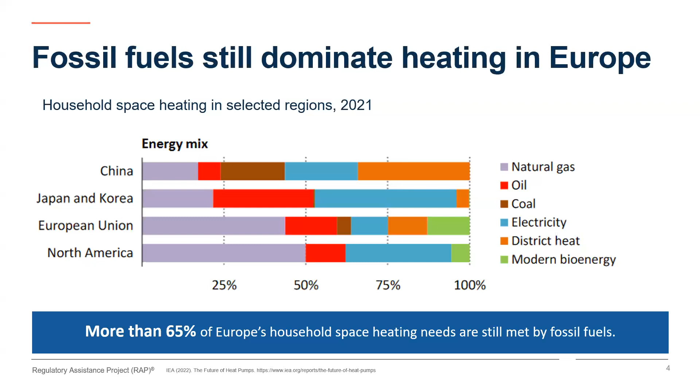So if we're looking at how to reduce the amount of fossil fuels in heating, we can look at a number of different scenarios. At a global level, scenarios show the massive role that heat pumps are expected to play in cutting fossil fuel use in heating. On a European level, we know this is true as well. We've seen this in various scenarios prepared by the European Climate Foundation, Cambridge Econometrics, McKinsey.

We also want to point out that before 2030, there's a rough estimate that you can see on the slide here. To meet the Fit for 55 reduction target by 2030, about 1 in 4 homes are expected to replace their heating systems. This is kind of to put things into a contextual scale based on the impact assessment. So there's no target for this or anything, but roughly this is the number of heating systems that will need to be replaced, which isn't including new buildings, but the actual replacements within this time period. So we're looking at heat pumps, district heat obviously playing a big role, as well as solar thermal, and some biomass, which I'm aware is a controversial topic.

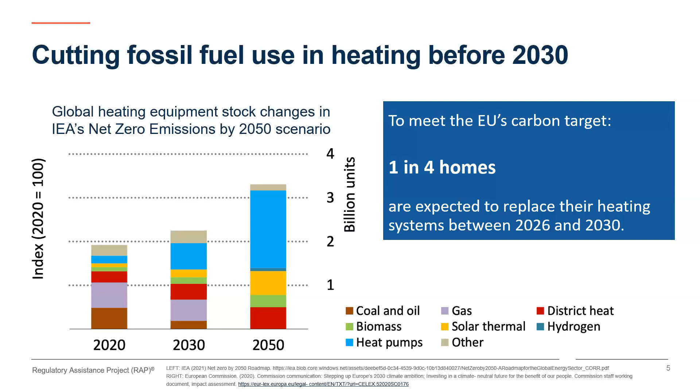In the other category, I want to mention the role of geothermal as well in decarbonizing heat in buildings. I believe that to be quite an important technology too. This context of decarbonizing heat is, let's say, framed by a lot more policy ambition at a European level.

Many countries are mandating the end of sales for fossil fuel boilers in many different ways, whether it's banning new connections to the gas grid for new buildings, such as in the Netherlands, or just banning the installation of new boilers, or coming up with new types of regulations, such as in Germany, where a minimum threshold of renewable energy needs to be met for new heating systems. Starting next year, there's a lot of phase-out policies that are coming into place.

And the European Union itself may ban fossil fuel boiler sales starting in 2029 through its eco-design directive. So this is kind of a wave of new policy that's expected to further accelerate the transition away from fossil fuel heating. And as always, we want to make sure that those who can least afford to heat their homes are not overwhelmed by this and do not fall victim to this transition. So we need to provide funding to help support them. That's part of it. And these are the solutions we'll get into in a bit.

But one thing we also wanted to point out is that a lot of countries are still subsidizing fossil fuel heating. In some cases, we can feel quite conflicted about these subsidies because, yes, it's a subsidy to install a gas boiler, but sometimes they're also very useful to households who are put in situations of distress, who might have an appliance break down in the middle of winter and need to replace it urgently and don't have 4,000 or 5,000 euros that they can just pay within the next week to do so.

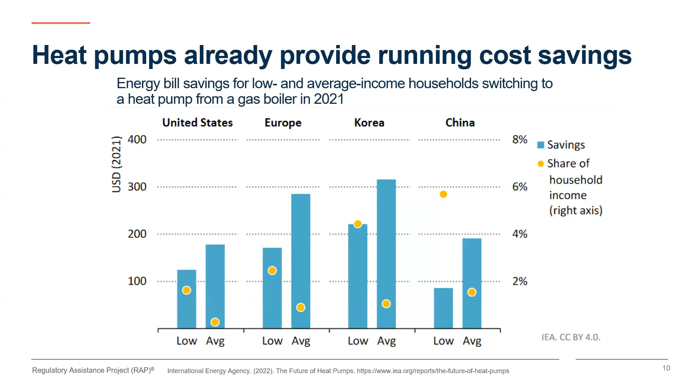This is just saying if you could wave a magic wand and switch from a gas boiler to a heat pump from one day to the next, how would that affect your energy bills prior to the gas crisis? And we know, looking over the longer term, that heat pumps, solar thermal, district heating will be the most cost-effective solutions for heating, not even for decarbonizing heating, but for heating in general.

This is a report by Cambridge Econometrics and European Climate Foundation that shows over the period 2030 to 2040, these different forms of heat pumps and solar thermal, and district heating is an honorable mention here as well, are the most affordable options to provide heating. So we know that this is expected to be the case, and this is the direction of travel in Europe.

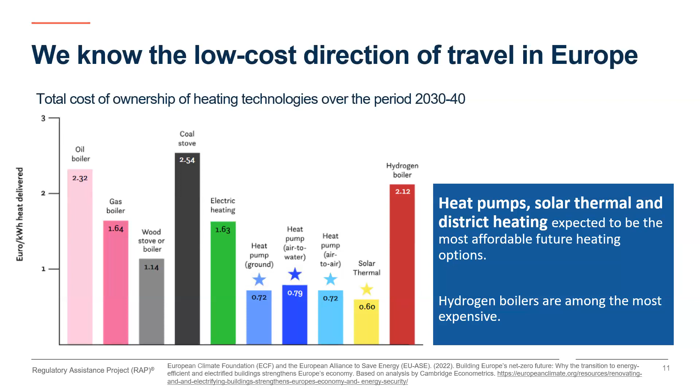We also know that hydrogen for heating, especially for those who have the most difficulty paying their bills, is not a solution. So if you look at our study and the presentation today, you'll notice that it focuses mainly on heat pumps. The reason for this is that the ownership models, the economics of district heating, are much different than an individual heating solution. For us, we wanted to look at an economic analysis comparing one technology to another, and it's simpler to look at changing from one individual heating technology to another individual heating technology.

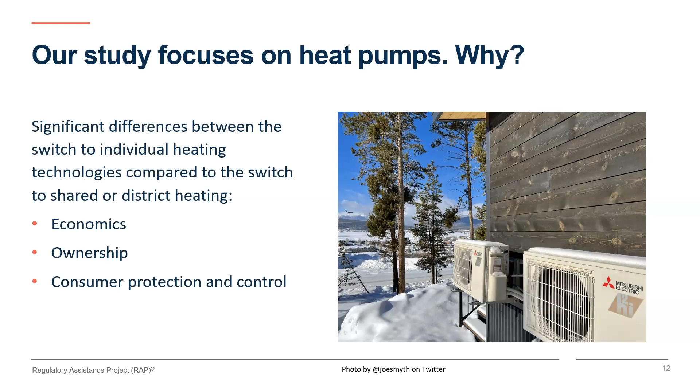There's also a number of different challenges that exist in the regulation and pricing of district heating, the access related to consumer protection and control, and there's a lot of work being done on this by other organizations such as BEUC, the European Consumer Organization, where we didn't want to step on their toes, so we decided to focus on individual solutions only. So let's get into it. The results from our work.

If we look at the economics, we use this to frame the solutions that we're going to provide. If we look before the energy price crisis, we chose countries that were very reliant on fossil fuels for heating deliberately. And we tried to choose them based on varying dominant fossil fuel types. So if we look at Belgium and Germany, we're looking at gas boilers. Ireland, there's still a lot of oil boilers. And Poland still uses a lot of coal for heating. So we tried to vary this.

We looked at the average energy use in households, but we also noted that lower income households tend to underheat. That means that they use up to 20% less energy for heating than the average household in a country. So we wanted to represent that in this figure and in our analysis. So we included that in this hatched part, the part that looks a bit like a candy cane. This shows the effect of underheating.

So if you compare, let's say in Belgium, the heat pump to the gas boiler, you can imagine 20% less heat costs for running costs means that if you're going to switch from a gas boiler to a heat pump, you not only want to switch the technology, but you also want to increase the amount of heat that's being provided. Or, I should mention, you also want to improve the performance of the building, so reduce the overall heating demand so that the increase in heating is less necessary.

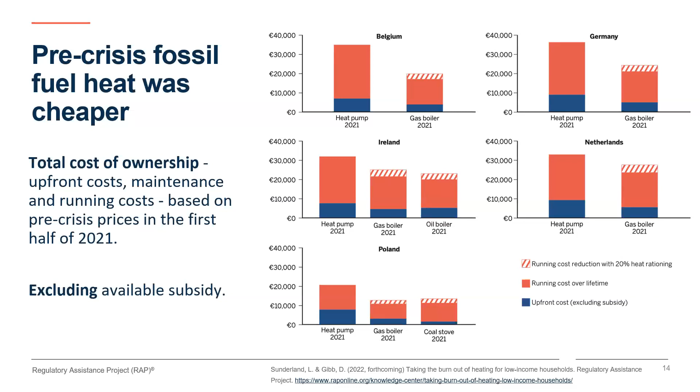So relatively speaking, an electric heat solution or a heat pump might be more economic than a gas boiler in 2022. We don't have updated numbers for 2023, but looking at prices in the summer of 2022, yet the affordability has worsened. So it just comes back to one of the points made earlier, which is that these volatile and high energy prices are not a solution to improve the economics of heat pumps. They're not a solution to drive the transition to clean heating. We need stable energy prices, and we need policies that target low-income households.

So we looked at how subsidy programs around Europe treat this. Specifically, we tried to look at how countries provide subsidies for low-income households. I'm sure many people listening to this understand that subsidy programs tend to favor those who have more means at their disposal, those who are richer. This may be because of the levels of the subsidy, the length of the program, or the nature of the subsidy. They provide things like tax credits, which can be deducted on your taxes in the next year when you file them. They aren't always grants or upfront cuts to the initial deployment cost, which is what lowest income households actually need.

So we dug a little bit deeper into the subsidy programs, and looking across the 27 EU member states, 25 out of 27 have a subsidy scheme for clean heat. Sounds good, but most of them are what we call fig leaf schemes. This means that they're there in theory, but they might be too small in budget, too short in the time frame, or too narrow in scope to be considered significant support. And they also cater to the higher income households. So we tried to differentiate them by income level, to see which countries provided actual subsidies for lower income households specifically, or provided higher levels. We found 9 countries that did that.

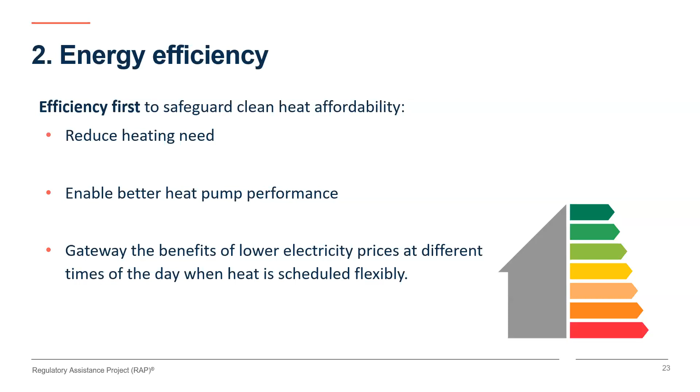And we look at a third option for reducing running costs. We see that there are many key winning technology combinations, such as solar PV on the roof, a heat pump in the garden, and some energy storage. All of these help lower energy costs for consumers, and they should be designed with low-income households in mind. So there should be programs that help low-income households access these the most. Those who are both low on funds to pay for them, but also those who are low on time because they might be working multiple jobs. They might not have so much time in the evenings to figure out how a new system works. These systems should be accessible, and this is something that we're encouraging: to remove hassle barriers and allow access to things like these technologies and energy-saving renovations.

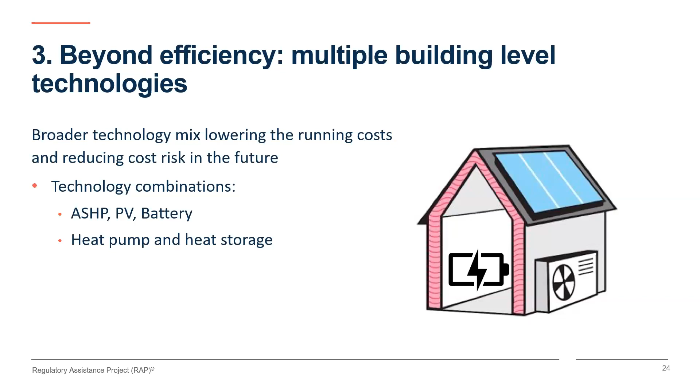An example of this comes from a program in Scotland put on by Warmworks Scotland and the Angus Housing Association, and they paired up some low-income households in this housing association with a heat pump and on-site PV and battery storage, and saw some great success in reducing the energy costs, the bill reductions, and a lot of satisfaction. So programs like this can be helpful also to introduce lower income households to the emerging trends in the energy system, or how they can better reduce their bills with new technologies.

We also want to talk about flexibility. So what we don't want flexibility to look like, or what we don't want to encourage, is people inconveniencing themselves to access lower energy prices. So it doesn't mean doing the dishes or ironing your clothes at 2 in the morning. What it means is having access to devices that can be programmed, so you can displace your electric load to the evening or to times where you have high generation with a solar PV system, that ultimately leads to public benefits. And the idea is to access flexibility value that is already there. And this is also a very big benefit to lower income households.

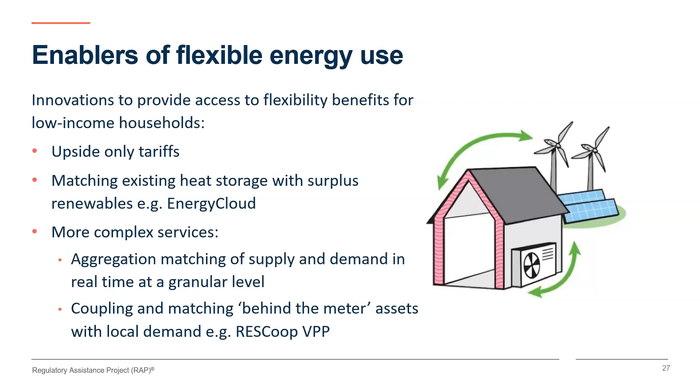The last thing for lowering running costs for heat pumps for low-income households specifically would be new business models such as heat as a service. This is quite interesting because heat as a service essentially allows any sort of consumer to sign up to an energy subscription, similarly to how you would sign up for a cell phone bill. You pay a monthly fee, and with that, an energy company would install a clean heating device, usually a heat pump. They will be responsible for the maintenance and the performance of this device.

And this takes the upfront cost burden away from consumers, especially for those who have the least means for it, and, from the energy company perspective, also provides them with a fixed, predictable revenue stream that they can even tap into in the future for more investments in their business. So these are examples of heat as a service programs that have been popping up around Europe, still mainly in pilot stage, but they're quite interesting, and especially for those who can't afford the upfront costs of changing their heating system or renovating, can be a very exciting offer.

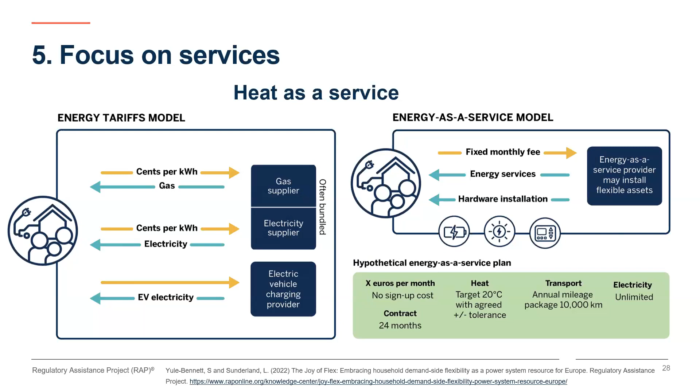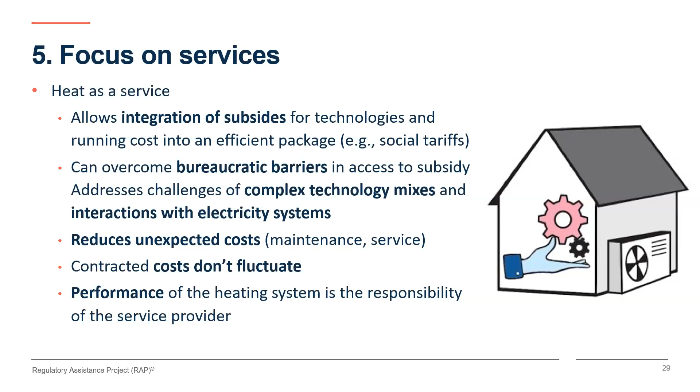So that almost brings us to the end of the presentation. These are the five key ways that we outline in our publication on how to reduce the running costs of a heat pump for low-income households. We have a few priorities that we mention in here as well, mainly the stuff that we've talked about already. So as a summary, we want to make sure that any subsidy programs take low-income households into consideration. I should say that even stronger, actually: not into consideration, but they actually become one of the number one considerations, that the subsidy programs are designed with them explicitly in mind.

We also want to make sure that these people who live in the worst performing buildings often tend to be those who have the lowest resources at their disposal. And these are the buildings, the F and G level buildings, that are the most urgent to renovate. And there should be funds that are dedicated and programs that work to make sure these buildings are renovated first, to lower the overall energy demand of these households before switching out a clean heating system.

We also want to make sure that in terms of running costs, we're incentivizing the use of heat pumps, the use of electrification technologies, by not overburdening the price of electricity with taxes and levies. And yes, there's work being done on an ETS that prices heating fuels in buildings, but there's also a lot that member states can already do for rebalancing their taxes and levies to put them onto more polluting fuels rather than cleaner fuels.